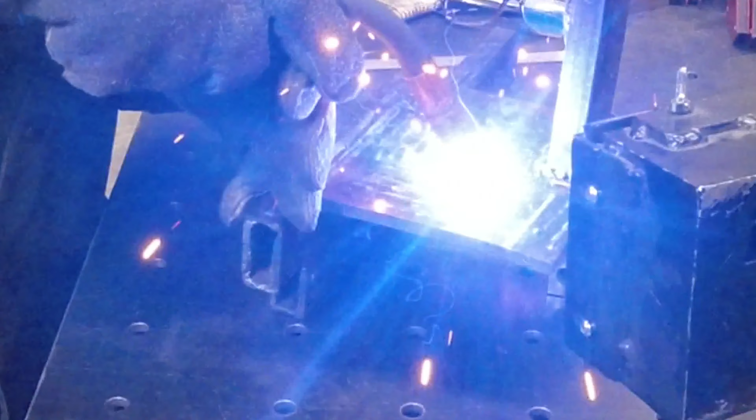So we're going to start a little fabrication series. I'm going to show you how to, if you just got a new welder and you're trying to figure out what to do with it, get it up and running. I'm not teaching how to be a certified welder, I'm not one myself, but if you're a hobbyist working in your garage, you need to get started. We're going to walk you through some of the settings, how to verify them, what settings to use, and some technique on how to get started. This will be one in a multiple series. So let me show you how to get that new welder up and going.

Doesn't matter if you have a Lincoln, a Miller, ESAB, Harbor Freight, whatever the brand. It all comes down to a few basic settings. Let me show you where to get started.

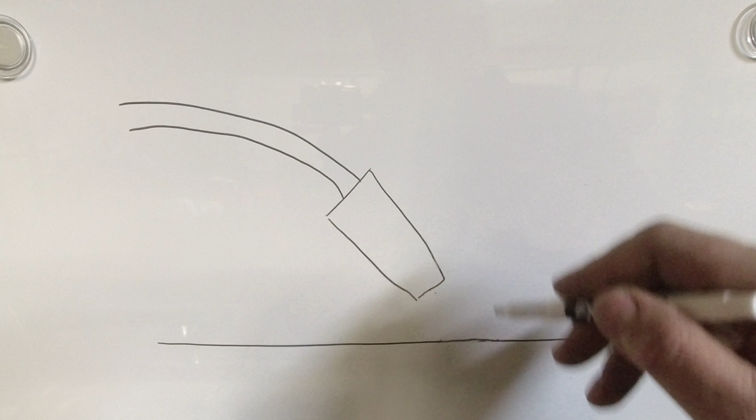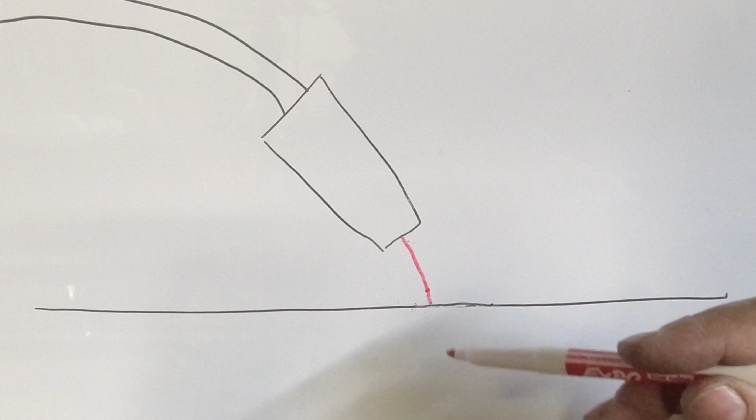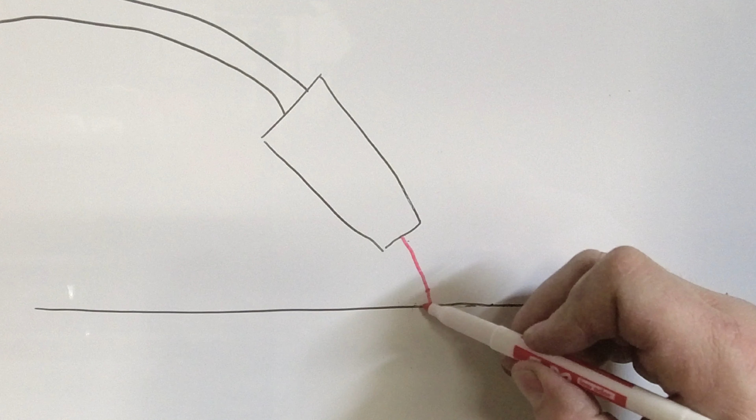So there's a couple different transfer modes when you're talking MIG welding, and we're going to go over short circuit MIG. As the wire comes out of the gun, it makes contact with the workpiece. This is going to melt back to a point, and it's this point that we're going to manage with wire speed and voltage. You don't want it melting back too far or too low. With ideal speed and voltage, this will come off and melt and make nice little beads as it goes across.

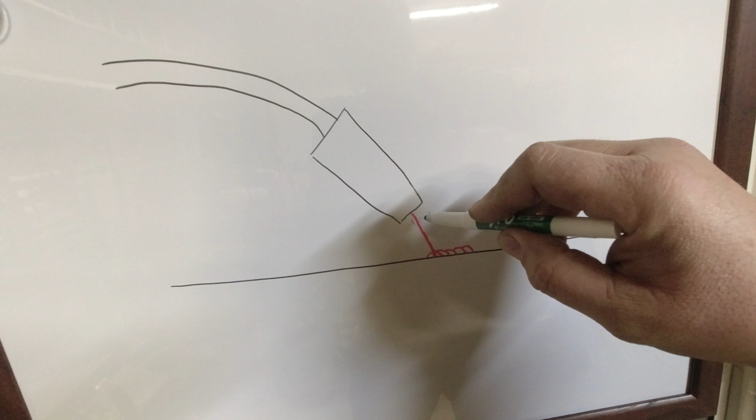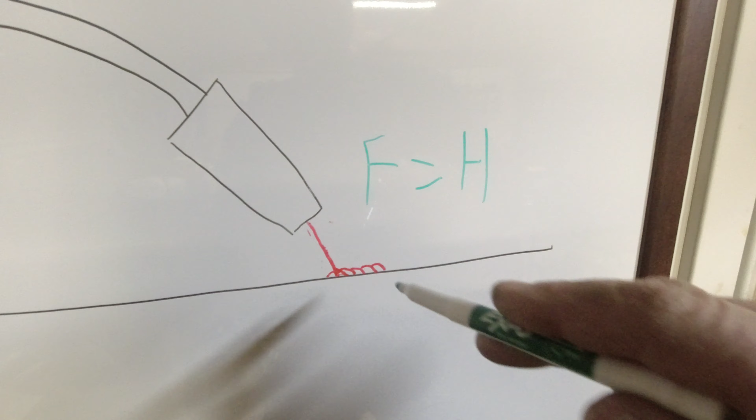Now on your wire feed, your feed equals heat, right? So your feed will equal the heat of the weld. If you can't get the wire feed, you can't put the voltage and or amperage into the weld. So that's why it calculates off of wire feed first, and then we'll set the voltage.

Now there's a couple things you're going to need to know when you want to set up your machine. You're going to need to know roughly how thick the material is that you're welding, and what size wire you're going to be running. So if we're running 1/8 inch material, and in our Miller we're running 35 thousandths wire, the wire's got 1.6 inches per amp burn off when it's welding. So the calculation comes out that I need roughly 200 inches a minute on the wire feed. And the voltage, well, we'll get to the voltage.

And keep in mind, this is all going to change. This is all welding flat. You start welding vertical up, vertical down, or overhead, you have to back some of these numbers off. So let me show you these on the Miller.

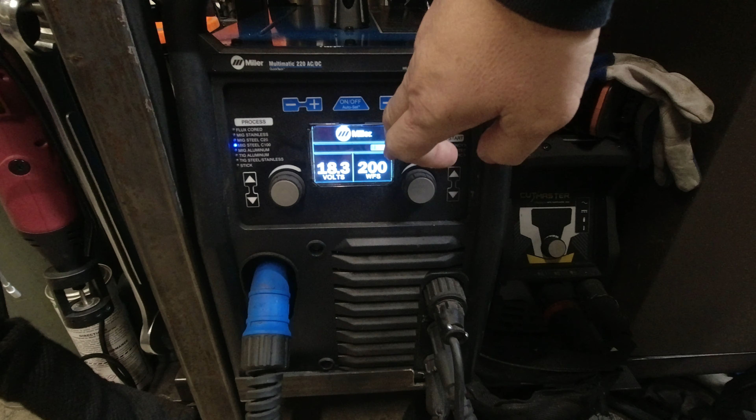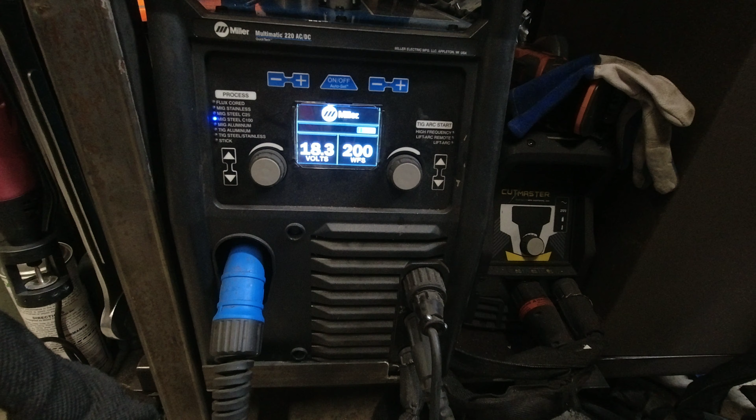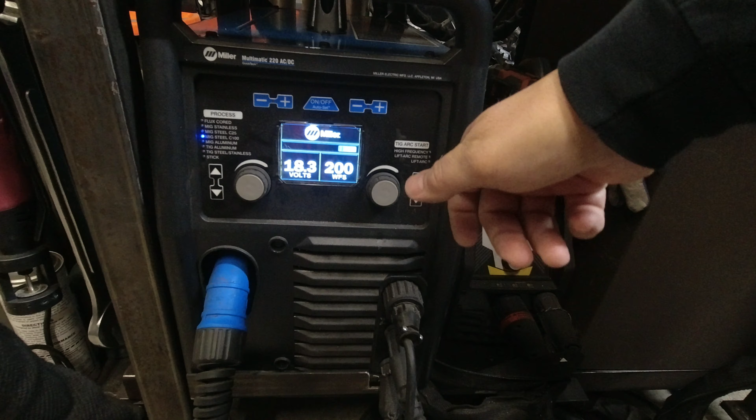Alright, on this machine, it'll actually tell you what your wire feed is. But what happens if you just have a 1, 2, 3, ABC, some other switch? If you're trying to get your wire feed set to 200, how do you know that's really what you have? So if on your machine you have a, let's say a 1 through 10, you could set it halfway and see what your actual feed is.

So if you break up a minute into 10 pieces, 6 seconds a piece, what we can do is run the wire for 6 seconds and then see how long it is, multiply that times 10, and that's how many inches per minute you're running. Okay, so this one's got a 2-stage, so it comes out slow, then fast. So I need to see, pull the trigger, the minute it starts feeding, there's 6 seconds worth of wire, and we should be around 20 inches of wire.

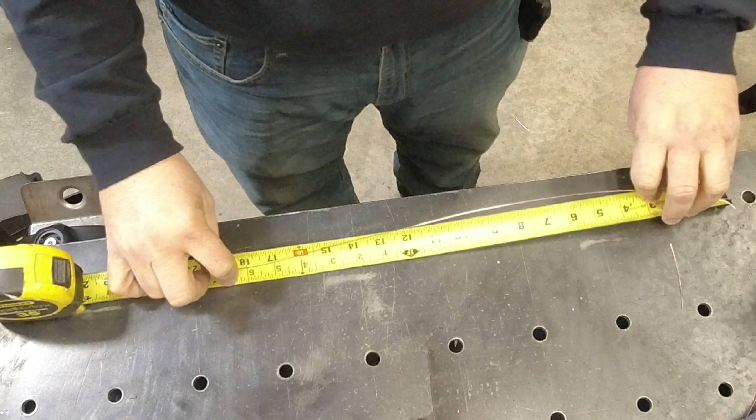Alright, so we've got this, so we'll just stretch this out on our tape measure. And since we have to kind of guess where it shifts gears, if you will, I'm about 20.5 inches. So I'm going to call that good.

But if your gun just instantly feeds the minute you pull the trigger with no pause, run it for 6 seconds, clip it, measure it. If you take that in inches times 10, that should be what you're feeding at. So if on your dial it's reading, let's say at a 5 it's 200, and at a 10 it's 400, you can very easily interpret where you need to be on your settings.

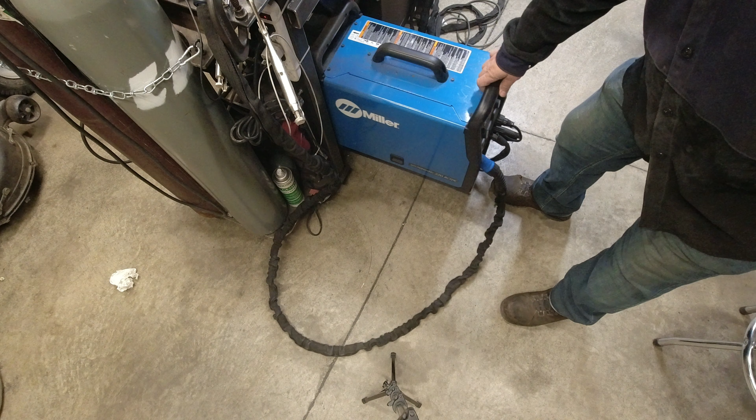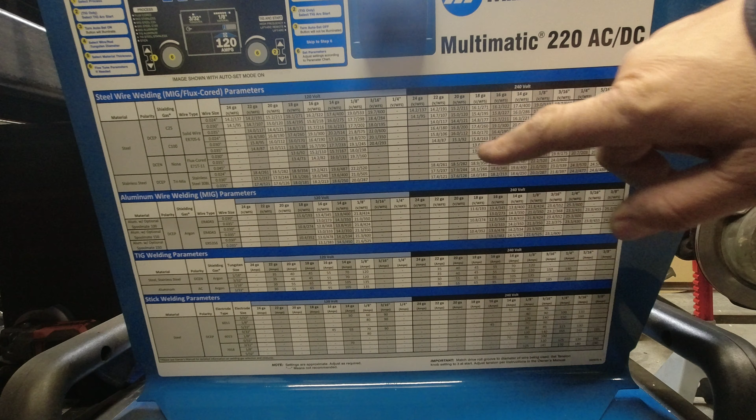So the Miller, like many of the machines, has a chart on the inside. Now this has a technology that allows it to auto set for you. But if you don't have that feature, you quickly come in here, and we're going to MIG with steel wire. We're using this 35 thousandths Rockmount Polaris MIG wire.

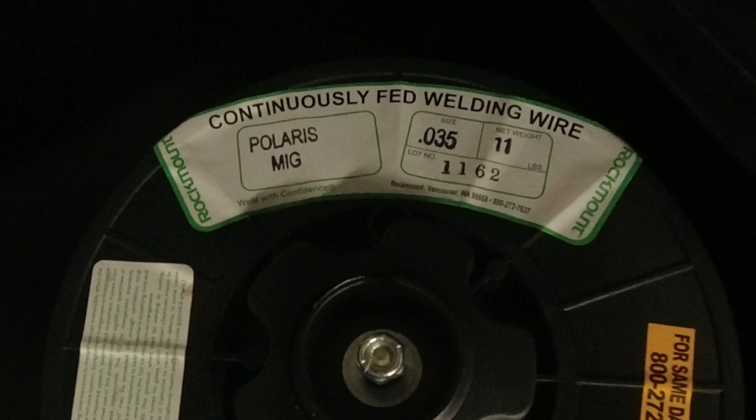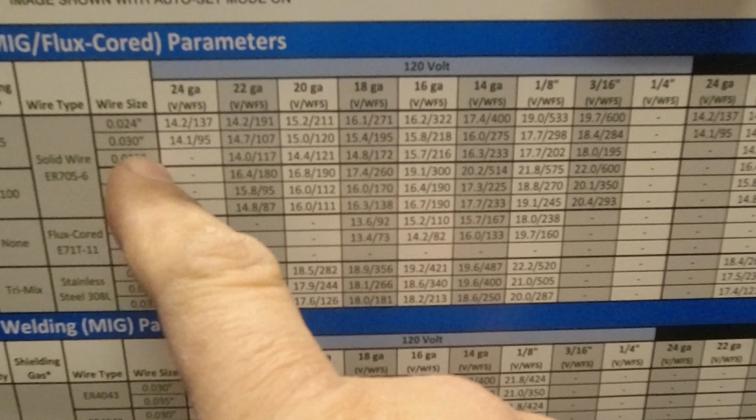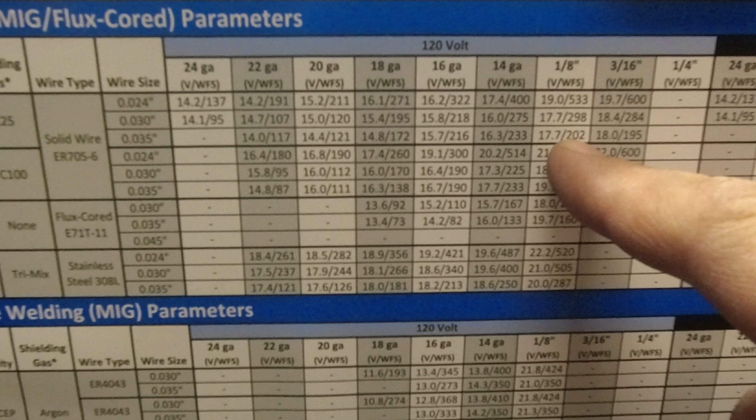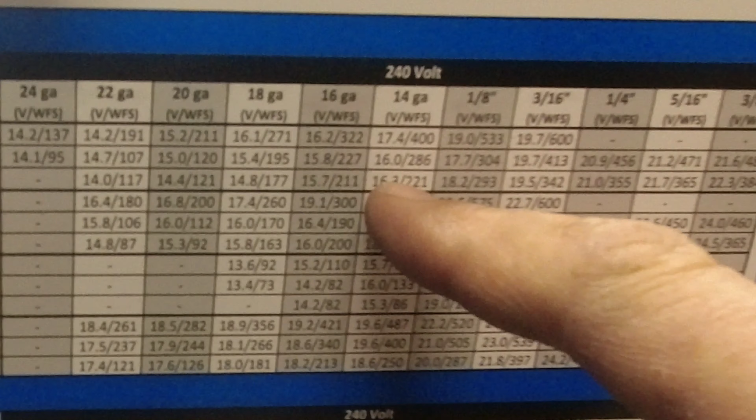Now according to this, if I'm going to be running C25 with 35 thousandths wire, and I'm going to be running 1/8 inch material, that's 17.7 voltage, 202 on the wire feed. That's for 120 volt. We have it plugged into 240 volt, so we're going to come over here a little farther for 1/8 inch. It says for the 240 volt, which is what we're running, 18.2 on the voltage and 293 on the wire feed.

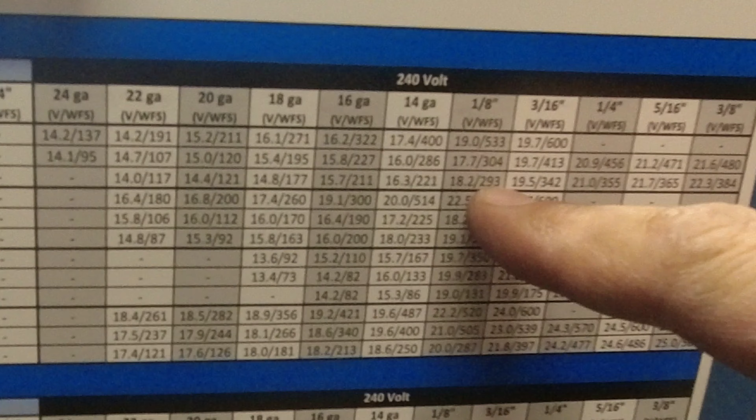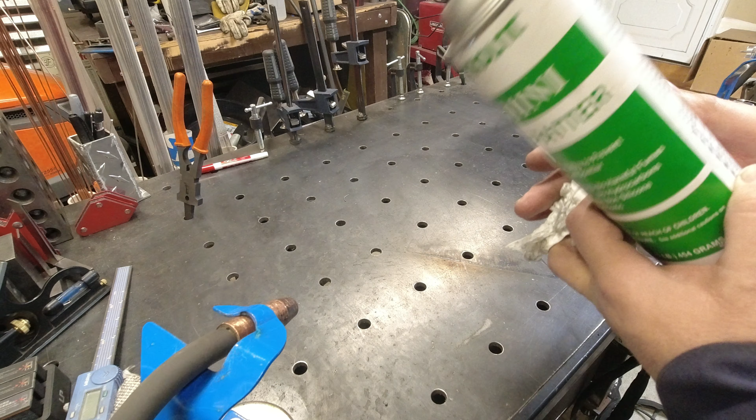Now get some anti-spatter spray. It helps keep your table clean, especially if you're going to be running flux core. You're definitely going to get a lot of spatter with that, right? So it's just a good way to avoid getting those big old clunkers everywhere.

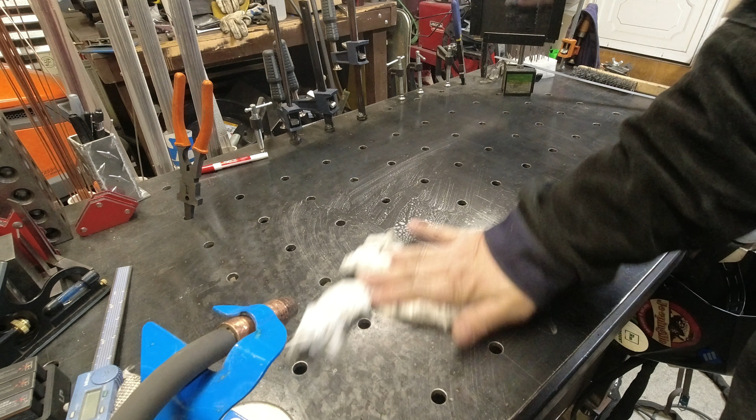Try to maintain about a 3/8 gap as you're going across there. As you're making your loop, don't push it in so your contact tip hits, and don't get too far away. Try to maintain about a 3/8 gap between the tip here and your workpiece.

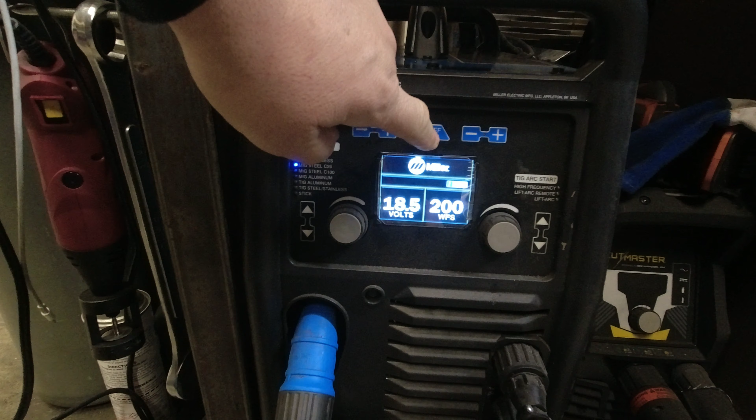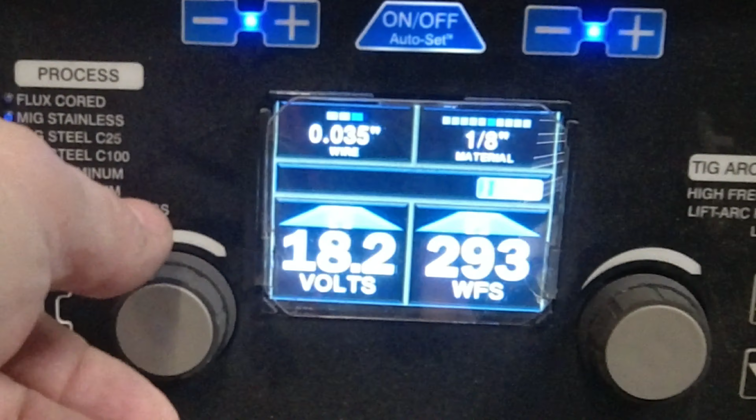So we had seen what the panel said. If we go into the smart settings, and we're set for C25 gas and we're at 1/8 inch material, 35 thousandths wire, it comes up exactly what it says on the lid. Now from here you can raise or lower the targets. This is what they call their pro settings. Now some of the machines have an auto set like this and some don't.

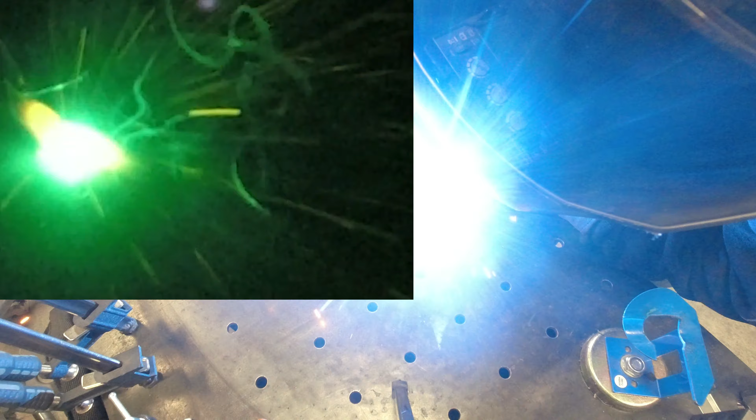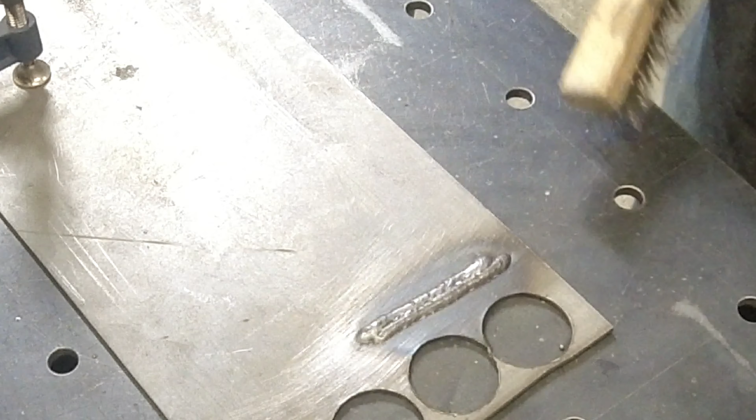Alright, I think those settings work pretty good. So you definitely want to manage your settings based on material thickness. So there's two other conditions. What happens if you're not running enough voltage for your wire feed?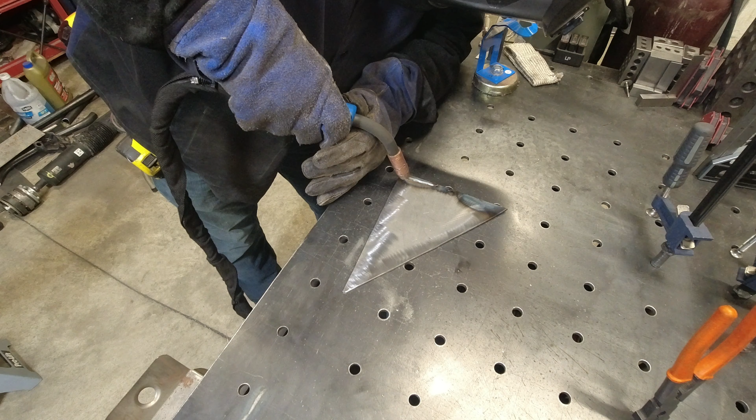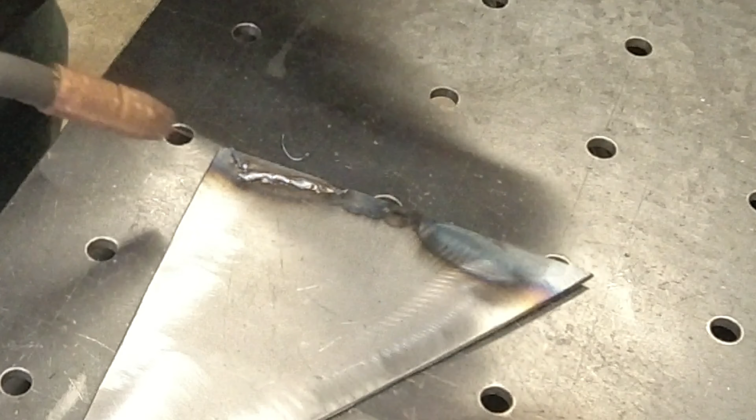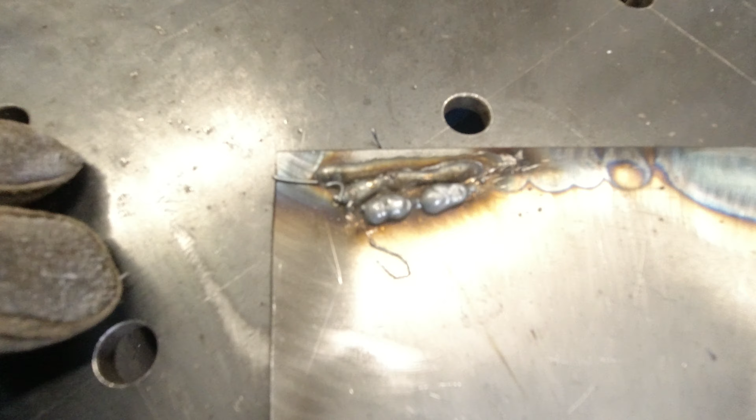So we're going to turn this way down so you can see. Let's go down to like 14. So you see a couple of pop-offs that it did. So let's go to an extreme case of that. Let's take it way down to 12. Alright, so you see what we have there. So you just want enough voltage for the amount of feed that you have.

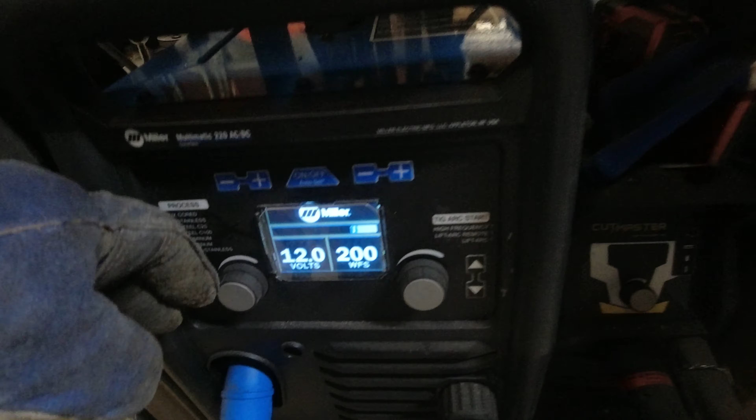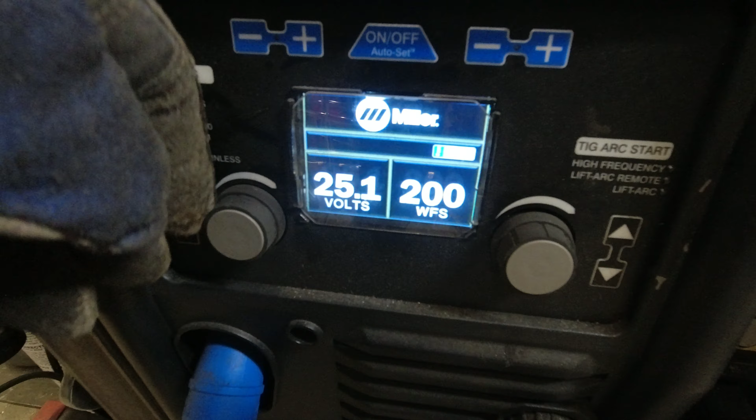So the two work in unison. While we say that the heat is all generated by your wire feed, you still have to have the voltage to support it. So let me show you if you've got too much voltage for your feed. We're going to turn this way up. We're going to go really high with this. Remember, if you just have a 1, 2, 3, A, B, C setting, you have no idea what you actually have.

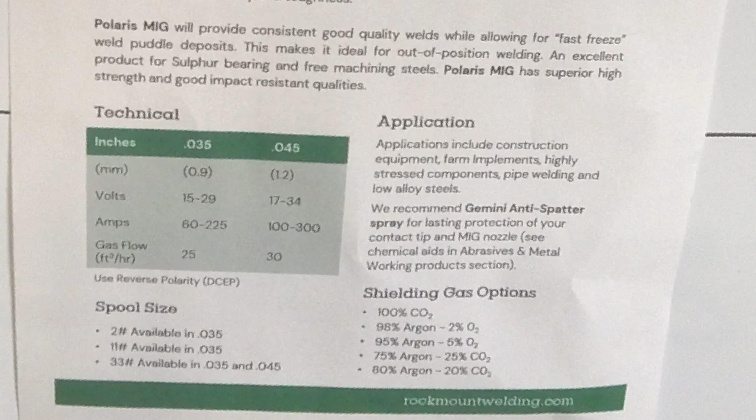So whichever case you have, whether you've got too much voltage for your wire feed or not enough voltage for your wire feed, do the calculations: get your wire feed first, then slowly either bring up or bring down your voltage. Now, how do you know what size wire you really need?

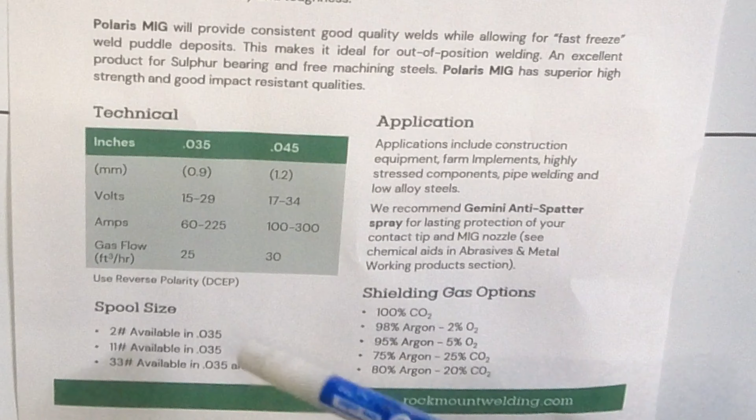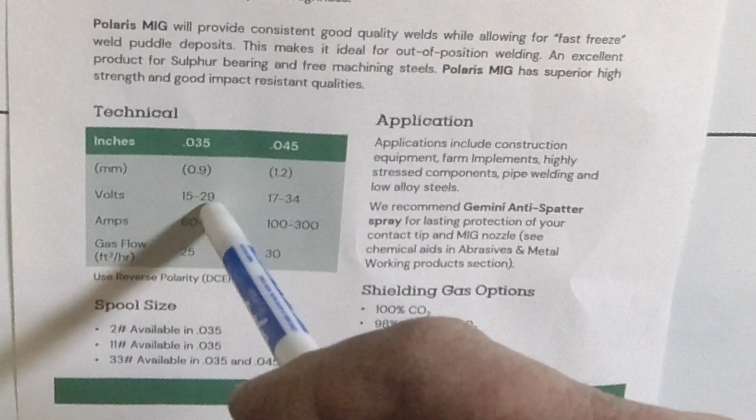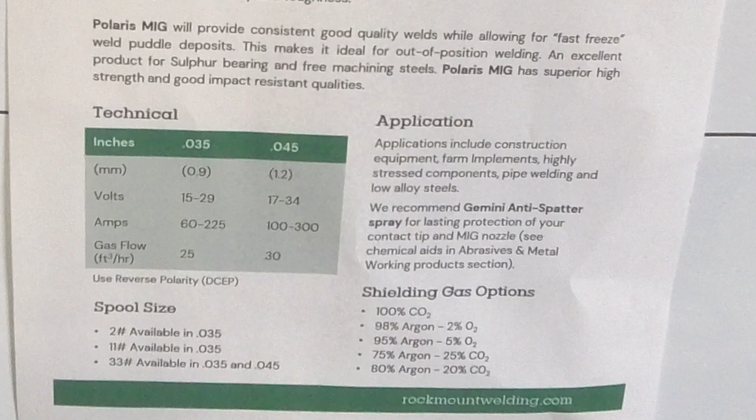So this is for our Rockmount Polaris that we run. It's calling out that we run 35 thousandths diameter wire. Your voltage range is 15 to 29, and we're running about 19, so we're right in the sweet spot of that. And for amperage, if you use the theory that for every 1/1000th of thickness you need 1 amp, that's 125 amps for 125-thousandths thick material. We're right in this range.

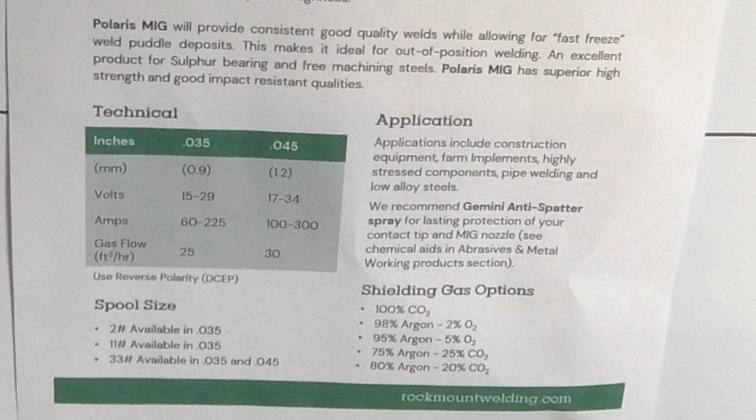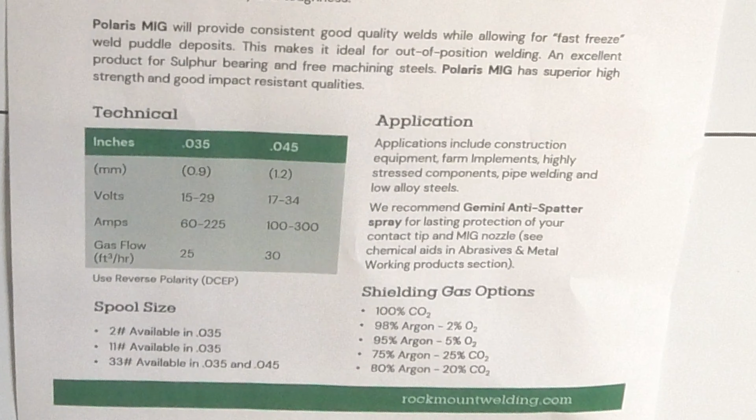Where this size wire wouldn't be any good is if you start talking about sheet metal, 1/16 or below, or around 1/16. That's going to be a lot of weld piling on really thin sheet metal. Now the chart also breaks down something we haven't talked about yet, and that's gas flow.

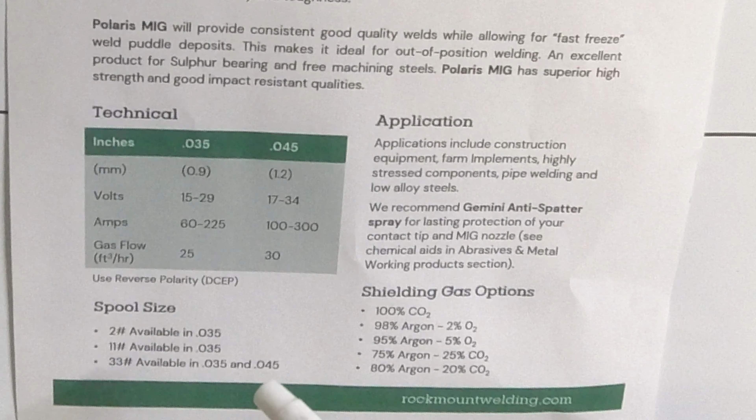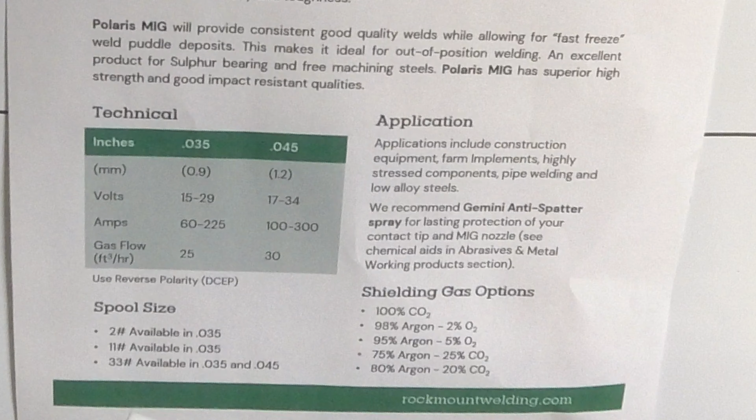So when you're welding, you need a shielding gas. We run C25, which is 75% argon, 25% CO2. Some people run 100% CO2 - you have to figure out what you want. Most places it's C25 gas. If you don't have adequate shielding, you're going to get porosity in your weld. Let me show you what that looks like.

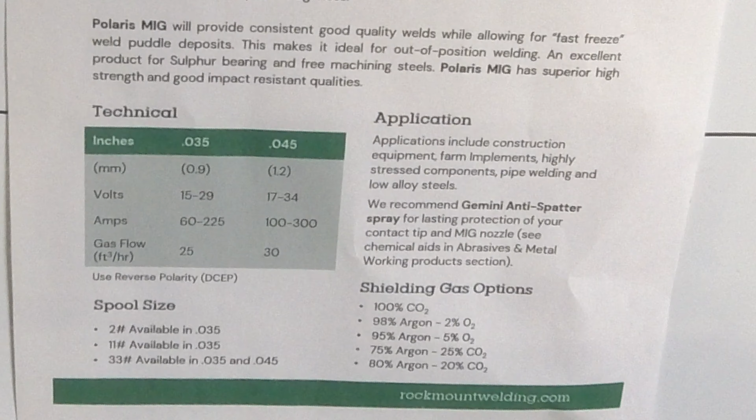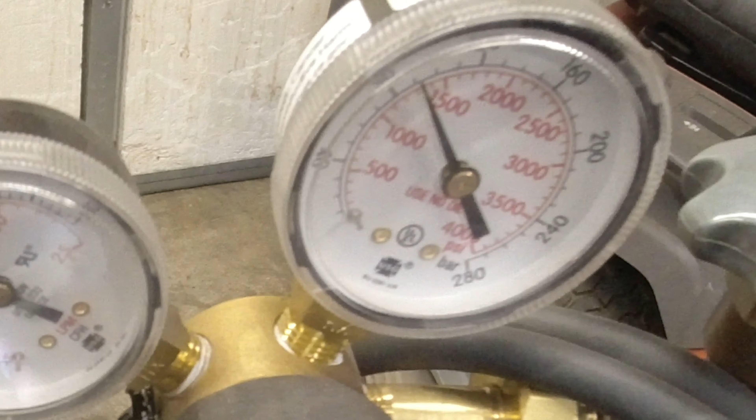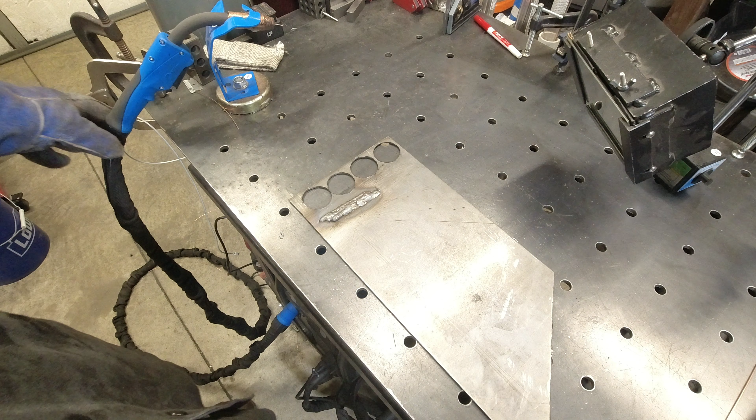All right, so here's our gas. Right now we're running, if we pull the trigger, 30 CFH of gas. All right, so that's one of the big advantages of flux core. If you're in an area where there's a lot of wind that can blow your shielding gas away, you don't need shielding gas with flux core.

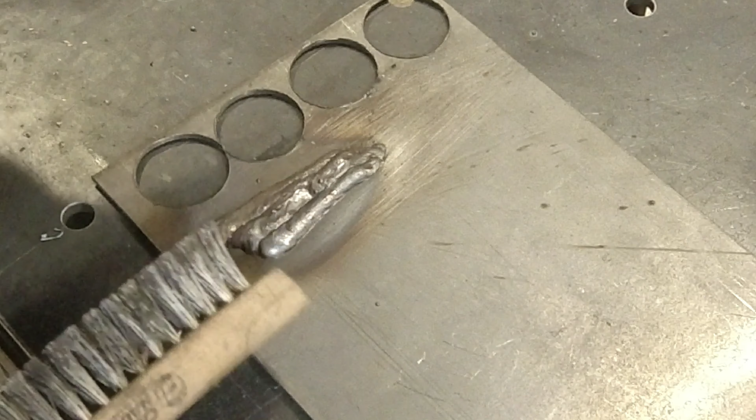So I barely had any shielding gas on that, and it's kind of hard to see, but there's a lot more oxidation on the outside of it. So let me go way down on the gas, as in turn it off.

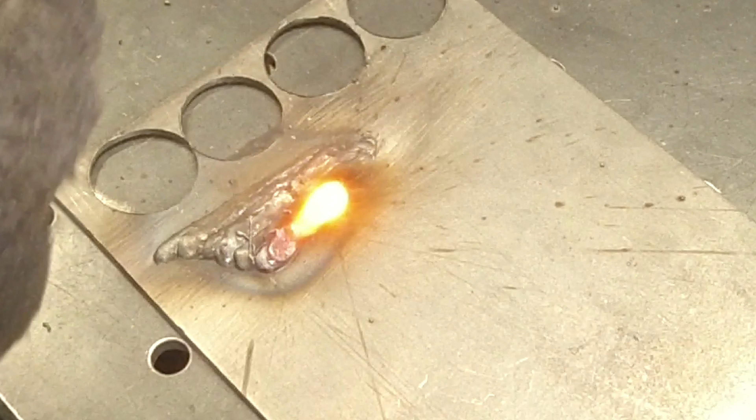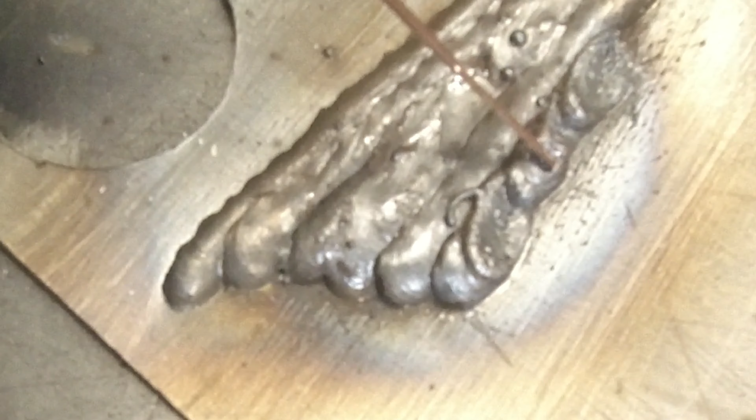And that welded like, well, crap - you can see all the extra spatter. Now the shielding gas kept all the oxidation and contamination out, and you can see what that shielding does for you. It keeps the weld in a good environment, and it lets it cool in that environment as well. This you'd have to grind out.

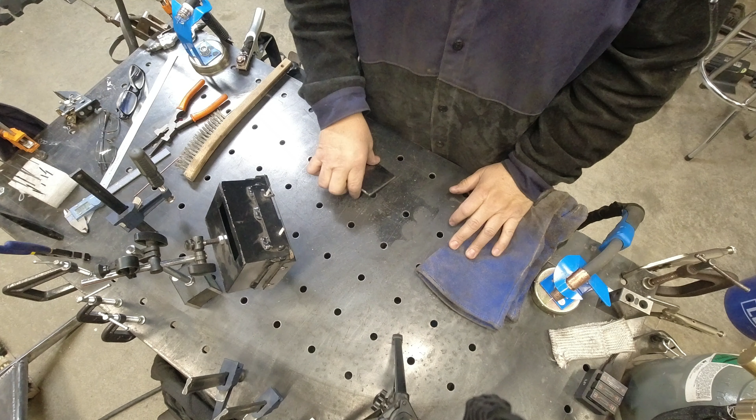Alright, so what I would suggest is get yourself a piece of material, maybe around 3/16, something like that. And we're just going to practice technique at this point. Once you've got your feed working right so that it's a nice smooth crackle, the next part of this is manipulation of the gun.

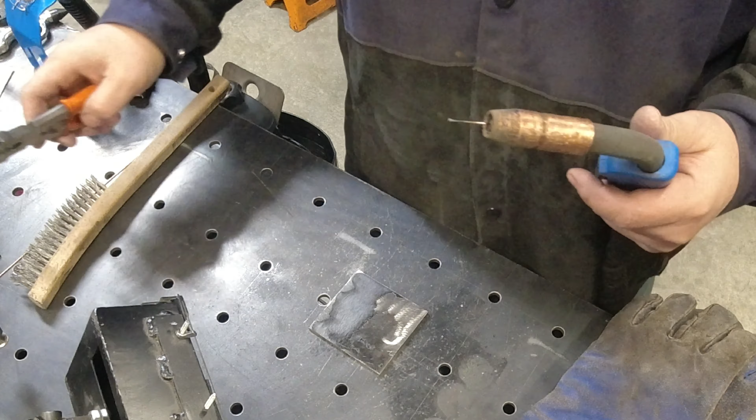So I always try to keep the wire - what I use is the pliers. If I just set them down on the nozzle, it's going to make it about 3/8 of an inch. So once you cut it, it's going to come out exactly 3/8 of an inch, and that's a good way to start.

You don't want to start every run with wire like this and let it pop off, because now that's either in your weld or stuck to it somewhere else. So just turn it over - good place to start. Also, make sure your nozzle stays clean. If you've been practicing and it's getting a little dirty, that's what this part of the pliers is for - just go in and ream it out.

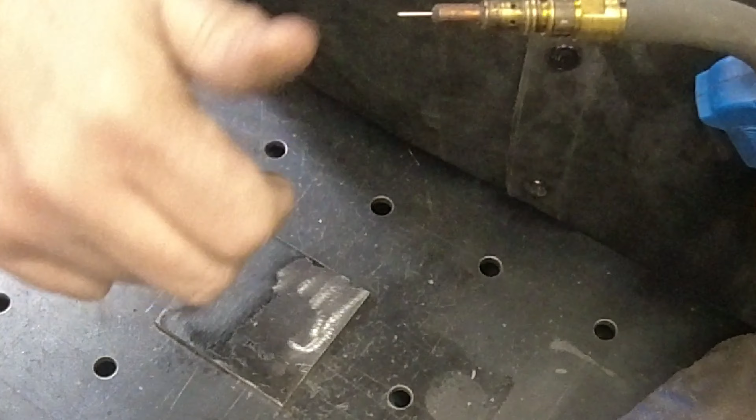Check to make sure your contact tip is still good, that it's not all burnt off. Your gas ports, make sure those are clean.

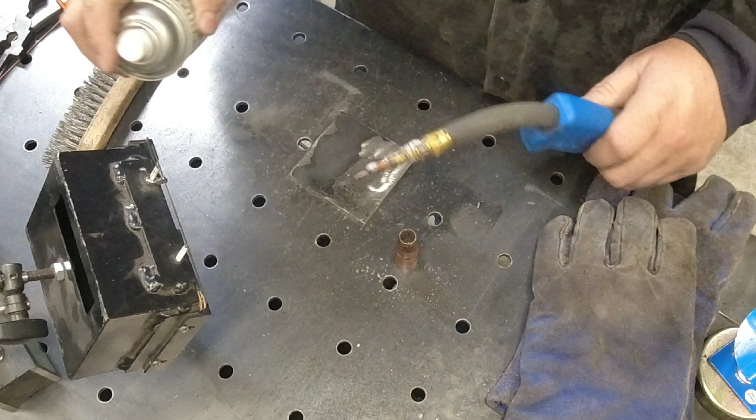They make a nozzle gel you can dip into, but if you do that, strike a bead on something first. Don't go right into your work, because it fills up your gas ports. I always give it just a little spray, and I also spray the nozzle.

If your settings are right, this doesn't really build up very much. And it's always good to have a piece of scrap laying around, so before you start welding on the job you want to look good, grab your scrap and lay some beads down on that first. Since we're welding with hard wire, we're going to take our welding gun.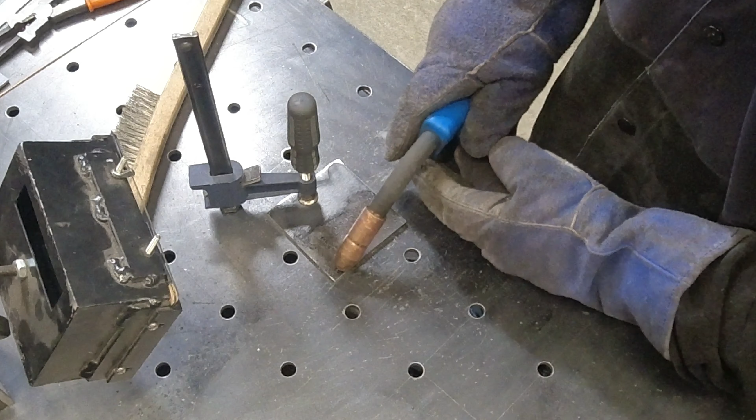If it's vertical, drop it back about 15 degrees and we're going to run. Make sure that you can slide your hand - you don't want your gun way out of position by the time you get out to here. The biggest part of this is being comfortable. Don't try to one-hand it, because your gun's going to be all up and down.

Get it in a good position to where you can run either here or here. If you're running very high amperage and you get this too close, the back of your hand's going to burn very badly. And remember, MIG gloves are always a little thicker, almost like the ones you'd wear for stick welding.

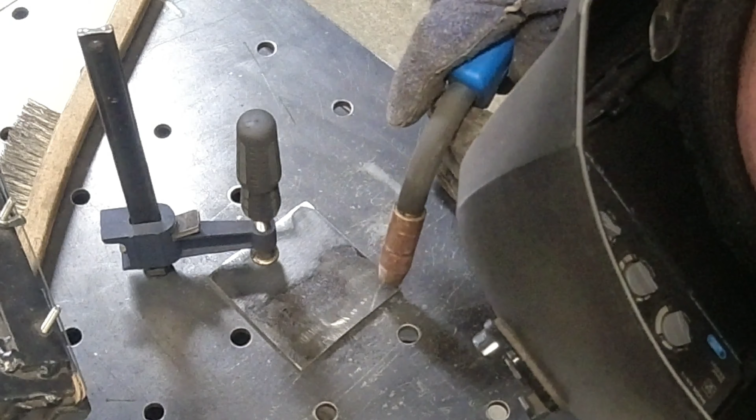So as I go, I'm going to just make a small loop all the way up, and you'll lay a bead down.

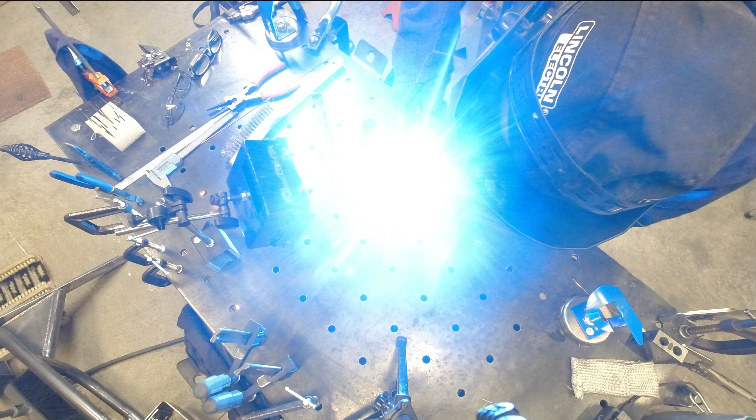Now when you're doing this, I'm making a small circle every time as I go through. You can run a stringer just as well, but the key is to make sure you're running on the leading edge of the pool.

It would be hard to show this, but if the leading edge of the puddle is here, don't be so slow that your wire is back behind it. Try to stay right on the leading edge of the puddle as you go. So your speed is going to also be the third component of this - voltage, wire feed, then your speed. Otherwise, you're going to build this big blob up.

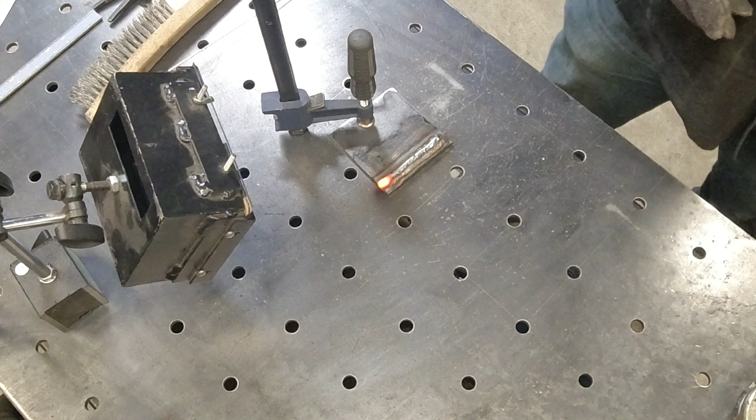So on this plate, just slowly go through it and lay bead after bead after bead, then just keep going across the plate. Go all the way across, then turn it over and go 90 degrees to it.

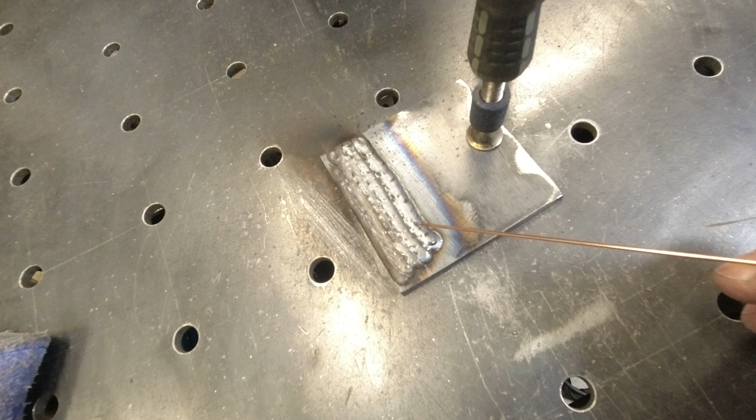Now what you're looking for is this hump. You don't want it to be too pronounced, which means it's probably run a little cold. And you want to look at the toes of the weld - you don't want those to look like they've just been rolled over on or dug out.

If you're running along fine, what you're watching is this pool - you're watching it backfill as you come around. So as you go, you're making a loop, you're filling, you're moving, you're filling, you're moving.

So let me show you what one looks like if you're running too fast, and one if you're running too slow. Alright, so if you're running too fast, it looks something like this. Then next to it, I'm going to put the one that's running too slow.

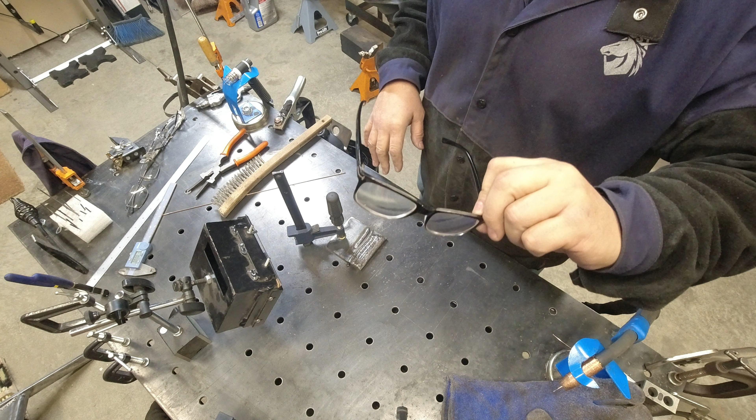Now as a little tip, if you can't see what you're welding, you'll never make a good weld. So I actually wear reading glasses in my helmet.

Alright, so if you see here, this one where I ran really fast really has no penetration - just a little worm track of a weld that ran through here, really didn't get into the plate at all. And this one where I ran real slow, you can see where it just kind of rolled over the edges - I was back behind the leading edge of the puddle. So the penetration's, I'm sure, not that good either.

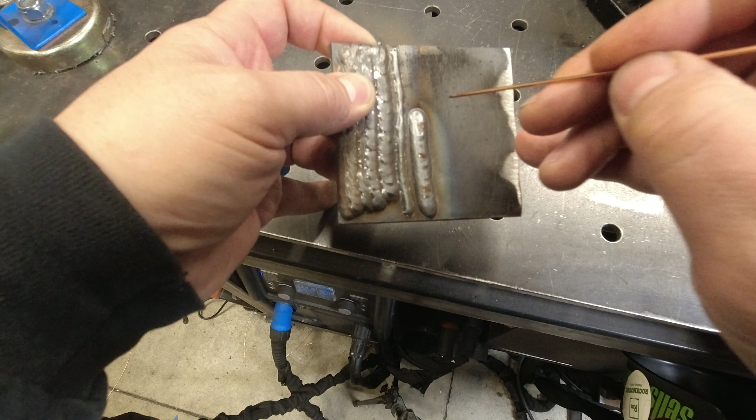So just always try to stay right on that leading edge as you walk it down. Just loop it, stay right there.